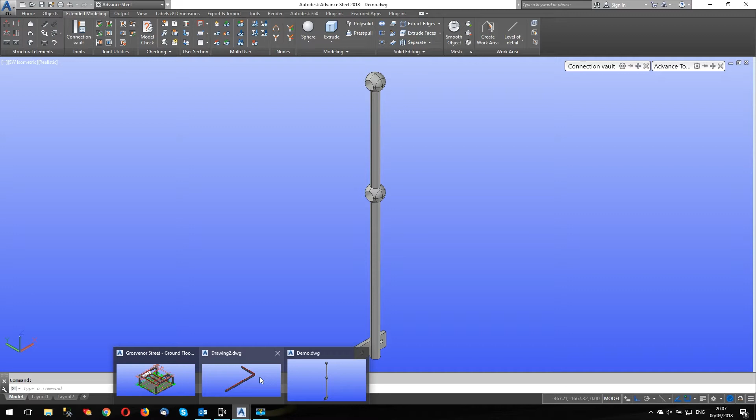Okay, so here we are, and the first thing I'm going to do is put a flat on the face of the flanges. So let's go to Objects, Flat, and I'm going to put it from this endpoint here to this endpoint here. You notice I'm using the shift and right click key to bring up the snaps. When I'm modeling in Advance Steel, I generally have node on as the only active snap. If I need anything else, shift and right click.

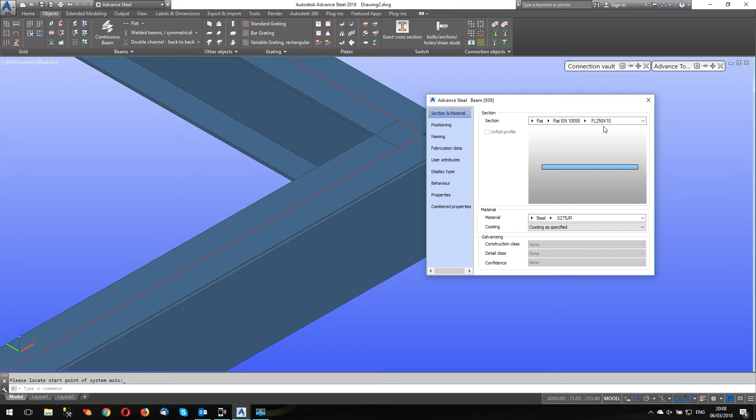I'm going to change the plate size. I know this is a 254 beam, so I'm going to change it to a 250 plate. You notice I haven't got much here in my short list - a lot of you will see this great big long list. There are settings in management tools called preferred sizes, where you can reduce the length of this list. I'm not going to go into too much detail about that now, but at some stage I'll do another video and we'll talk our way through that.

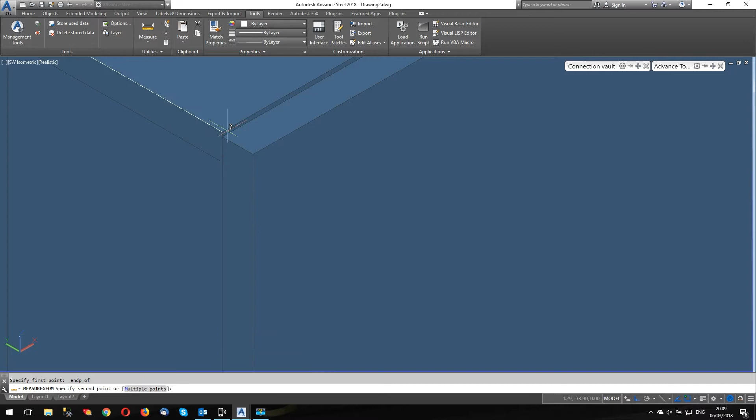Okay, so here's my plate. I've not welded it on, and you notice it's not aligned with the top - the plate's a bit smaller than the beam. For people who are a bit pedantic like me, what we can do is move that up to center it, of course there's no need to do this. So what have we got? We've got 1.4, so that is moving up 0.7. There you go, I'm a happy man now - centered plate. I think it must be a man thing, I don't know.

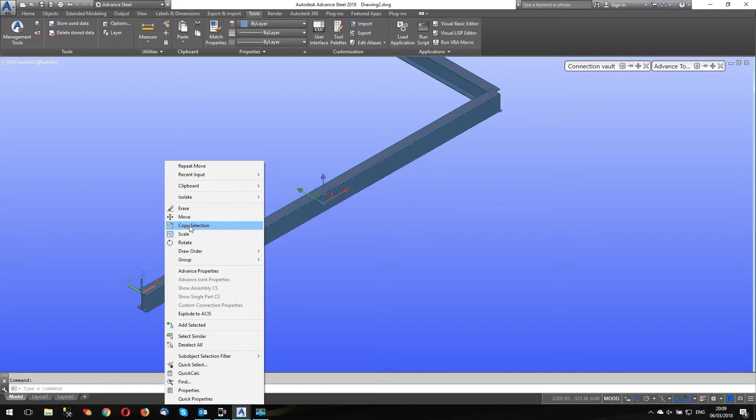Alright, I'm going to copy this - dumb beam, dumb copy, as I tell people that I train. Dumb beam, dumb copy. And I'm going to copy it to this endpoint here. Then I'm going to use a dumb rotate from the endpoint there, and rotate in this direction. And I'm going to split this beam.

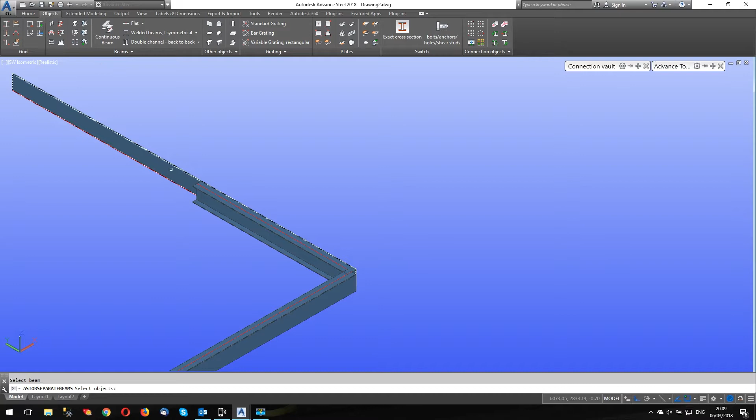So I'm going to split it there. I think I had a gap set earlier - yes, I did. And I'm going to split it at the node there, and get rid of this bit. So here we are, I've got a plate now on the front of the two beams.

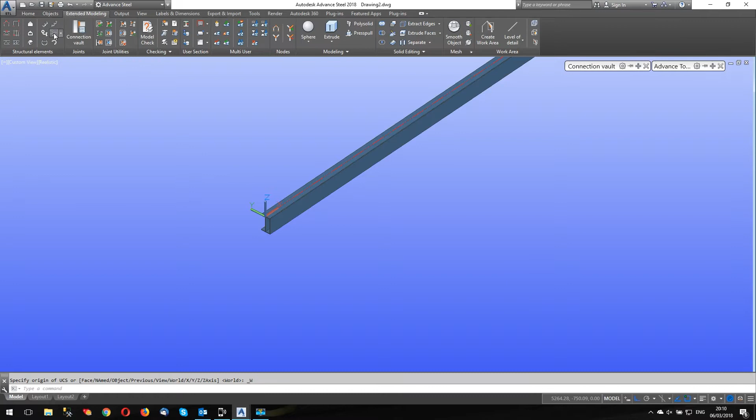Next, we're going to put some railings on. So we're going to make sure we're in World UCS, and we're going to go to the Extended Modeling Ribbon, and here are the railings. As you know, if I select both these parts, the railing will automatically go around the corner onto the two beams, or onto the two plates in this case, or two flats.

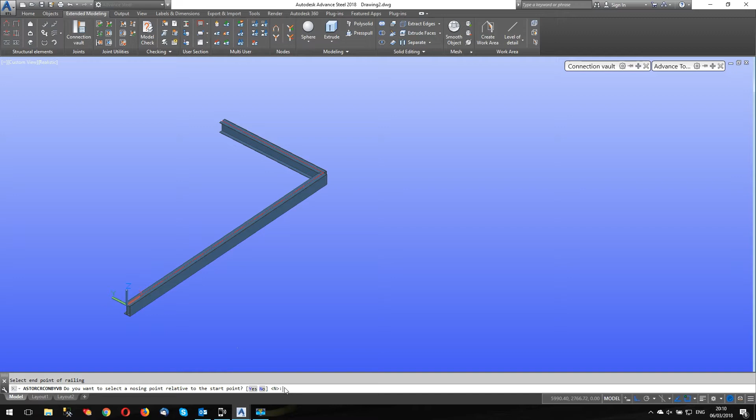So my start point for the railing will be here, and my end point will be here. And it says, do you want to select a nosing point relative to the start point? This refers to nosing points on staircases, so in this case the answer is no - the default is no, we can see that, so we just hit return. There's my railing, simple as that.

And we're going to edit it. So let's have a look, see what we're going to do. The first thing I do - kick plates. Bit of a non-starter, to be honest, in the railing macro.

If you wanted a continuous welded kick plate, then that's fine, you can do that. But normally we're going to put the kick plate on with things like U-bolts around the stanchions, or you might have tab plates welded to the posts. We can't do that in the macro, so I generally turn them off, and I would model those myself.

Okay, so let's have a look at the post first. Now I'm going to use a round post, and it's going to be 38 solid, and I'm going to replace this later on, but this is for placement. So I'm going to go for a 38 solid.

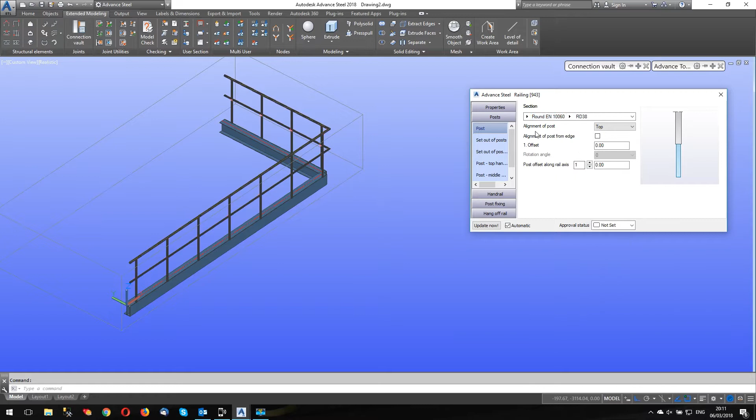Alignment of the post to the top. Well, I don't want it aligned to the top, I want it aligned to the face here, which happens to be right face. Two chances, left or right. I'm bound to get it wrong the first time, managed to do it every time.

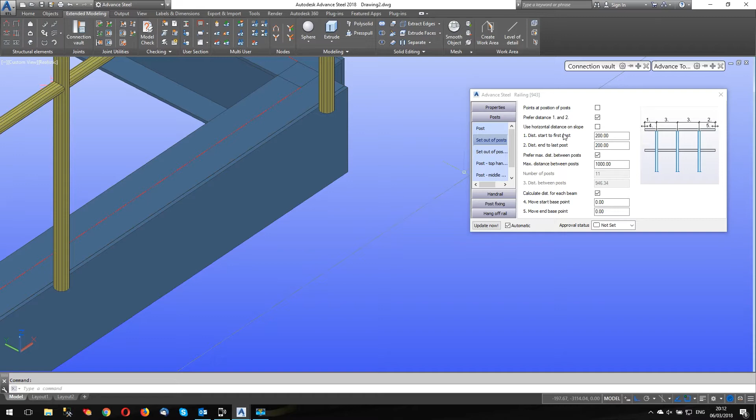Set out of posts. I've got a start and end point here, start to the first post and distance to the last post. That refers to this distance here to here, post to end. And I'm going to use a standard that I know, which is Wessex Water, and it's 300 start, 300 end.

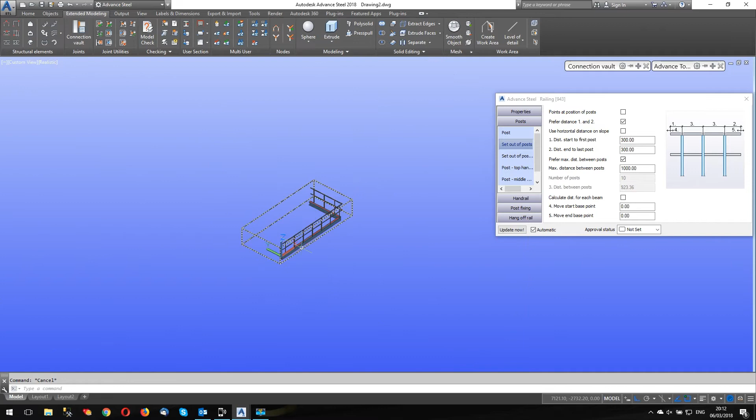And it says calculate distance for each beam. That means it's going to finish the calculation for the length on each of these beams. If I turn this off, what it'll do, it'll start at the 300 here, and whatever the centres of the posts are, I'm going to set this to 1500 centres. It'll do 1500, 1500, or close to it, allowing for equal distance.

So we'll just say 1500, 1500, 1500 around the corner, 1500, and then my 300 end. They're not actually 1500, you'll notice they're 1375. That's because it's equal distance, allowing for 300, 300, and equal distance between. If I make it calculate distance for each beam, it's now 300 and 300 and equal distance between. So you can see here, this is changed slightly.

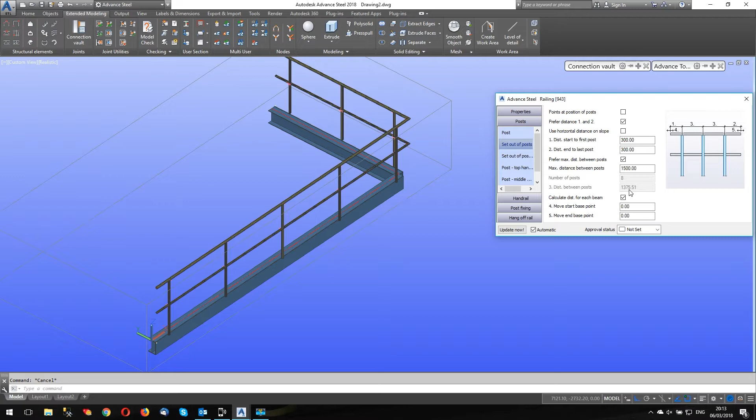So there's my basic layout. Let's have a look at the hand railings. I've got a tube hand railing here. I'm going to use a CHS. And you'll notice my short list, 42.4 at the top. I use it quite regularly.

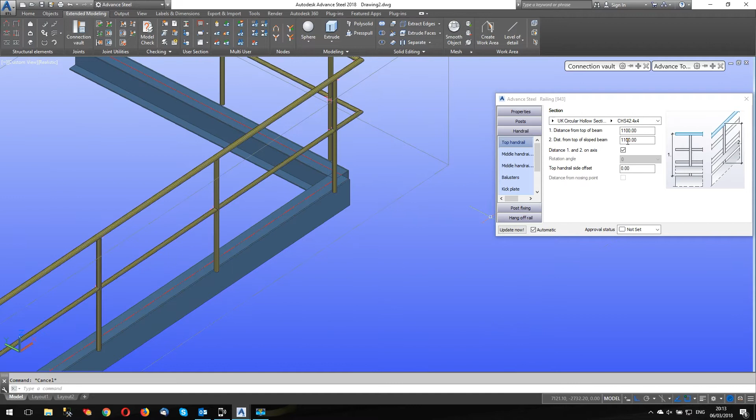Distance to the top, that's from the top of the beam, that's the top of the plate, so we have got that slight discrepancy, and I could add it on here. I'm not that pedantic. So the middle handrail, again CHS and 42.4 by 4, and you'll notice it's being measured from the bottom up 600. I'm going to say measure down from the top 500, and there it is.

And this is on slope, we haven't got slopes, so we don't need to set that. There's no balusters, this kick plate.

Handrail to handrail joint, I might change this to radius. And I know that those very nice people at Lionweld Kennedy can do a 90mm radius on 42.4, so I'm going to use that in this example. Of course, you would set this to your tooling radius, so it's worth having a check, see what you can do with that.

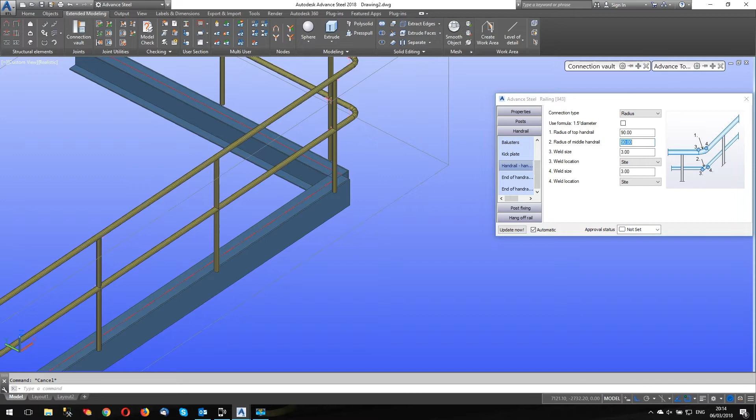Okay. End of handrail, I'm not going to bother with that, but we know we can put a loop on the end of this, either end or various methods of.

So let's have a look at the post top handrail. I don't need to worry about the fit on the top because I'm going to replace this post eventually, so I'm not too concerned about that.

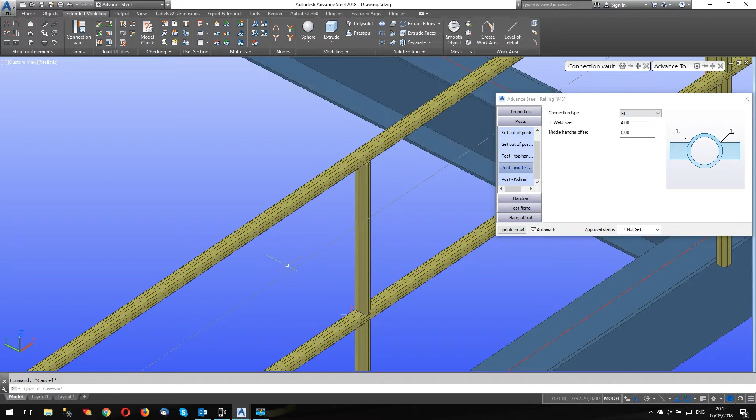The post middle rail, however, because I'm using solid stanchions, I want this middle rail to be continuous, so we're going to call that continuous there. Can't turn off the weld, but obviously I'm going to delete that later.

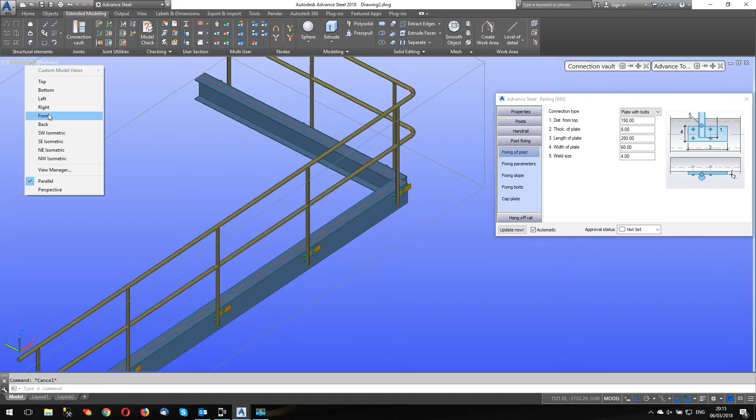Post fixing. In this case, I'm going to use plate with bolts. And that's a mess. The easiest thing to do with this is to go into a straight view, so a front view in this case, and I can see what's happening with this plate.

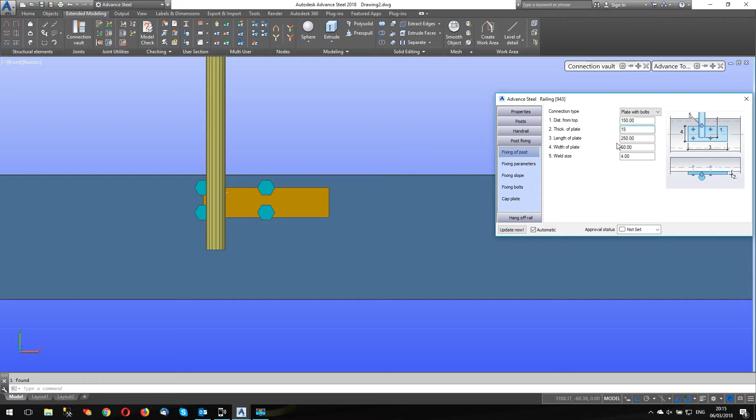So let's go to post fixing. So the first thing I'm going to do, distance from the top. This is from here to here. We'll leave it at 150 just for now. Thickness of plate I'm going to make 15, and length of plate I am going to make 150, and the width of the plate I'm going to make 65.

Again, that's a Lionweld parameters, just happen to know that.

I'm going to go to parameters, fixing parameters 2, and this involves placement of bolts, placement of plate, all this sort of stuff. So what I'm going to do, the edge distance number 1 is from the top of the beam, in this case the flat, to the top of the plate. I'm going to just make that 75, just a bit of a guess there.

And the offset here is the center of the post to the edge of the plate, and you can see it's 25 in this case. Well, we have a 150 plate, so to center it would be 75.

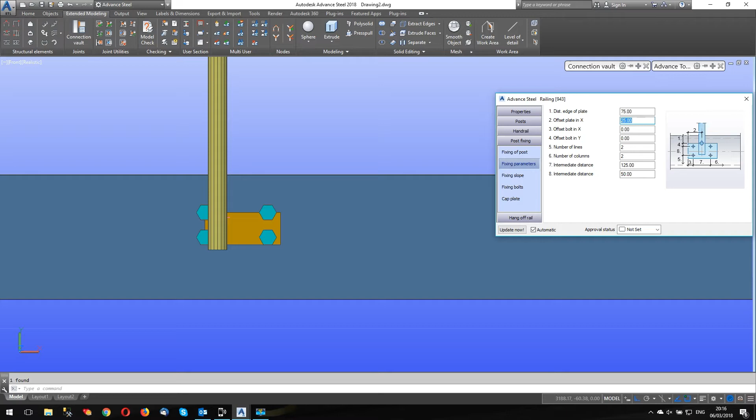I only want one line of bolts, and I'm going to center these bolts. So the intermediate distance is 100, Lionweld again. I'm not plugging Lionweld, I don't work for Lionweld, it's just that I know their standard. So the edge distance there is 150. 100 leaves 50, divided by 2 is 25, so we know that. And the distance here, so 65 plates, that'll be 32.5.

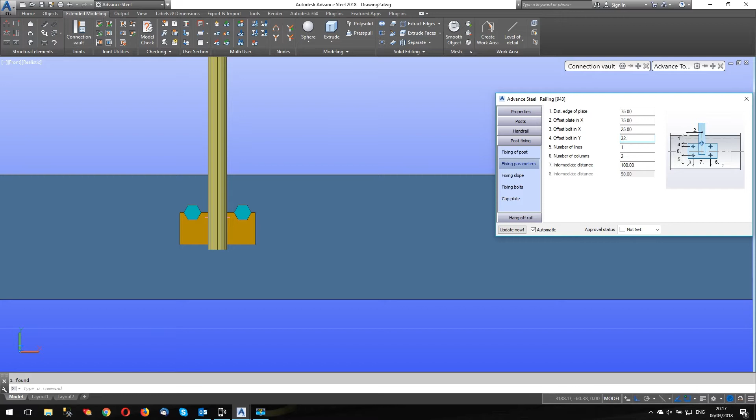There we go. And the last thing I'm going to do is the fixing bolts are going to be 16s, again specification, blah, blah, blah. And I'm going to change this distance from the top, and I'm going to guess this really. Well, it wasn't a bad guess. They are 140. Obviously, if I wanted to put an end cap on here, I would be 137, for instance, and the cap plate would be 3.

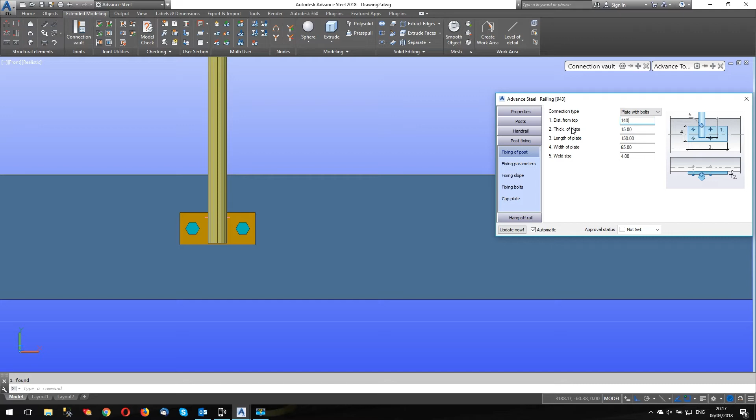But I don't need it in this case because I'm going to delete all this. So all I want this for is just position of posts. And there it is. That's it. If that's all I wanted to do, I just need to split this plate, this beam, this flat, beg your pardon, and delete the bits I don't want.

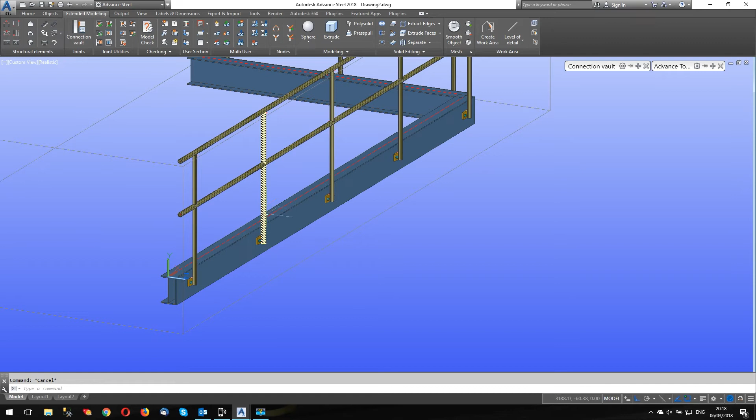However, because this flat forms part of the railings, if I were to split this and delete it, boof, off go the railings, and we're back to square one. So unfortunately, what we need to do now, we need to delete the joint box. And if I train you or anybody else trains you, they'll say, oh, you never delete the joint box. Well, unfortunately, in some instances, we have to delete the joint box. And this is one of them.

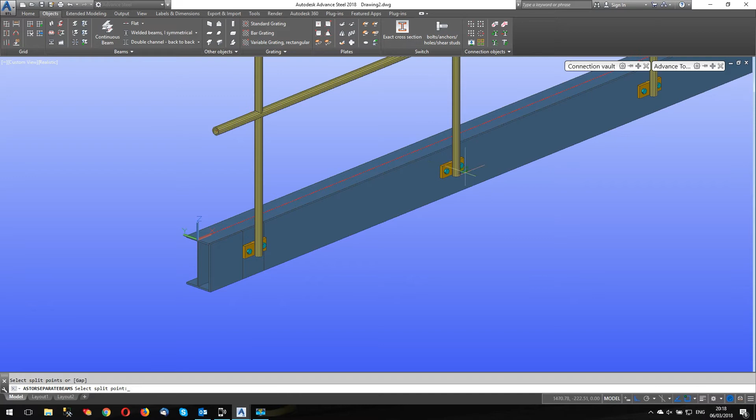What I'm going to do now, I'm going to split this beam using split beam. I'm going to split this, and I'm going to use the corners of the plate. So there you can see, look, I've split that. I'm going to split this one. Doesn't matter which corners we use. If I use that back corner there and the front one here, wouldn't make any difference. It's still going to split on those axes.

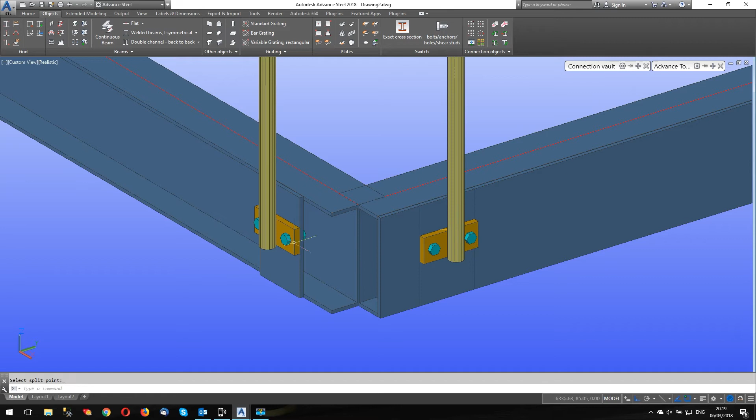Okay, so I'm going to split this again from there to there, and I'm going to delete the bits I don't want, which is those and those and those and those. Gone. Let's just rotate around here a bit. Let's do the same thing here. So I'm going to split this one there to there, there to there, and there to there. Delete, delete, delete.

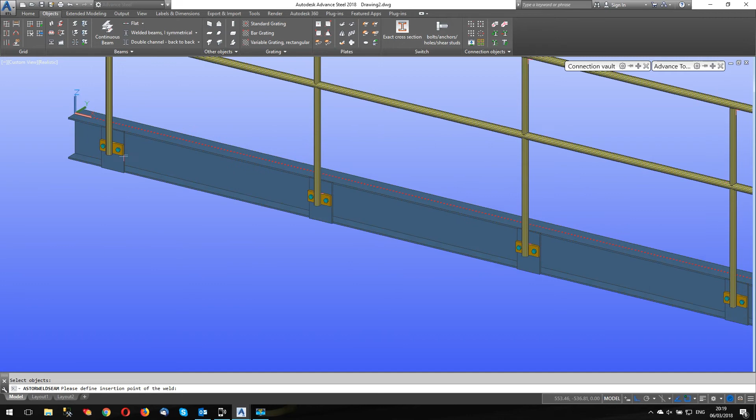Now I'm going to cheat here. This is a bad habit, but just for speed, what I'm going to do, I'm going to select all of those, and I'm going to put one weld, and again I'm going to select all of these, and I'm going to put one weld. There it is. Alright, simple enough.

I'm going to come back to these welds here in a minute because they're not desirable. We're going to do something with those.

What I'm going to do for now, these welds, I said we couldn't turn these off. So all I'm going to do, I'm just going to select all of these welds. And I'm going to delete those. I beg your pardon, delete the corner pieces as well. Didn't mean to do that. Just quickly do that again. I need those.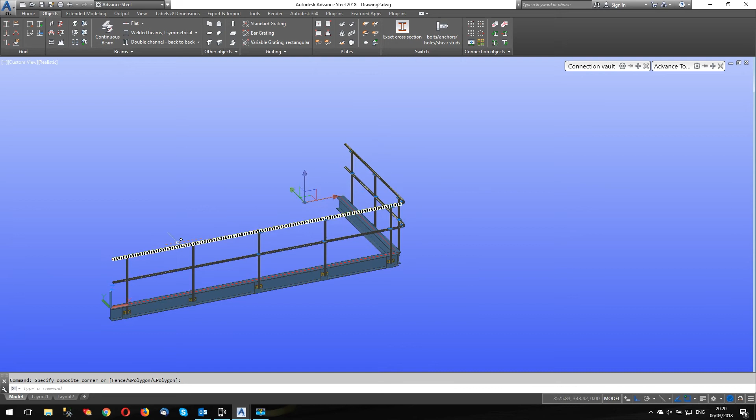So remember to deselect something. I hold the shift key down, I select it a second time, and that would deselect the selection, as it were. So there we go, I've just got rid of those welds. Save me a job in a minute, that's all.

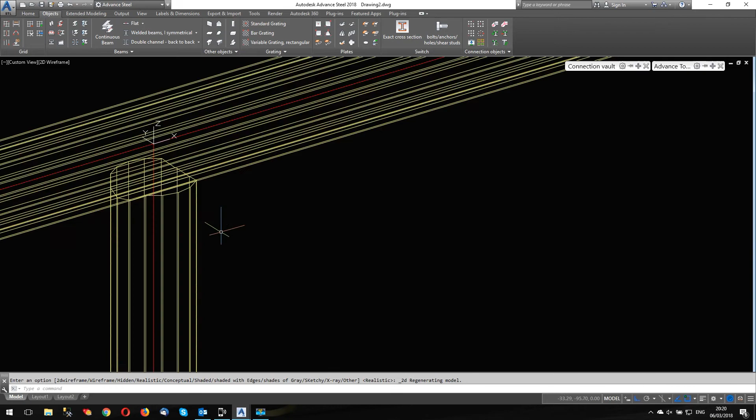And what I'm going to do, I don't need to do this, but I'm going to put the UCS at the top of this column. If I go into 2D wireframe, you can see where it is, look, center of the handrail, top of the column.

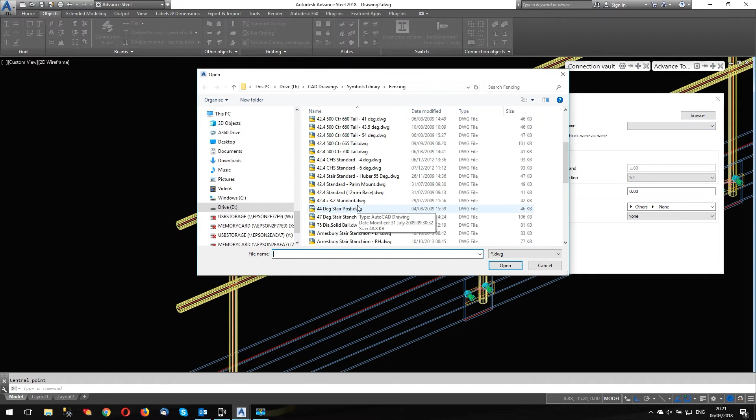And what I'm going to do, I'm going to use the good old Advance Steel special part. And the central point, of course, if I hadn't moved the UCS, I could have selected it. And then it asked me to choose the special part to insert, and I'm going to go here, and it's the one that I did, which is the demo. It says block already exists because I had a little play earlier on. Yours won't say block already exists, overwrite, because it was already in my system. So here it is, and it's inserted the block, and you can see where it's inserted it, and I'll tell you why it did that in a minute.

I can add some information to this. So if we knew the weight of it, I don't know what it is, let's say it's 20 kilos, probably a bit much, 15 kilos.

Coating, we're buying it in anyway, but we know it's going to be galvanized material. Other, I'm not interested in that, we're buying it in. Now when it comes to naming, I can call this railing post, because we know we've got one, so we can use that. The free remark isn't going to be used anywhere in the system, but the commodity number is, so we can call this a 38mm diameter solid stanchion. Let me turn off the caps lock this time and try that again - how many times do we all do that, it drives you mad.

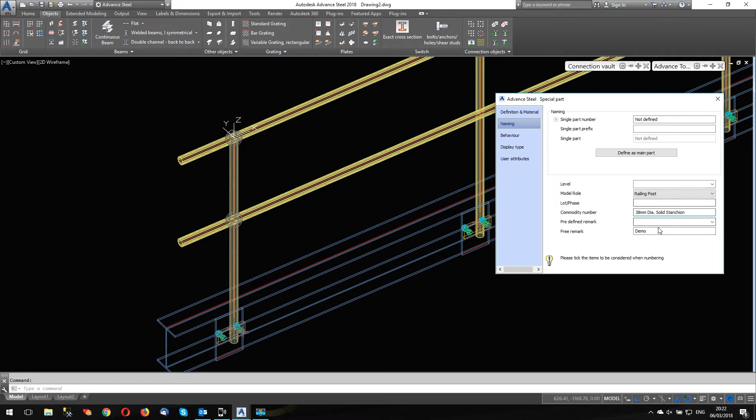38mm diameter solid stanchion. There you go. This is going to show on my material list. It's going to list these as special parts, using the commodity number to list it, so we know what we're ordering, how many we're ordering, etc. That is it.

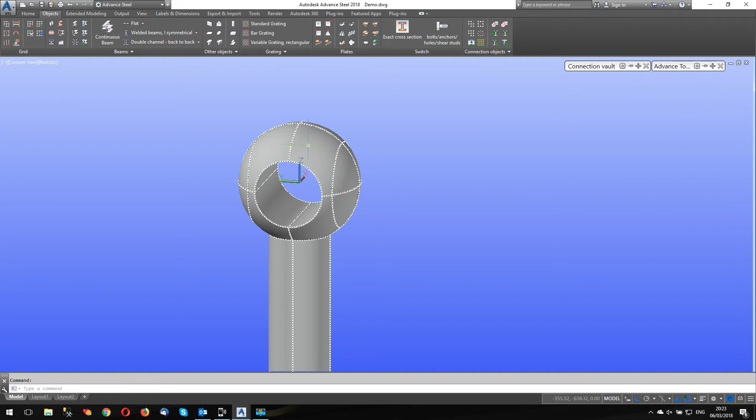Okay, when I inserted this, you'll notice it inserted where I put the UCS, at the top center of the railing, the intersection between that and the column. That's because when I created this part, I made sure that when I saved it, that insertion point was on the UCS. So I made sure I was in World UCS, and I moved the solid stanchion from the center of the ball to the UCS 000.

And the other thing I did, I put it on layer 0. The reason you do that is when I bring it into Advance Steel, I can then change the color. If I put it on any other layer, the layer would fix the color and I couldn't change it.

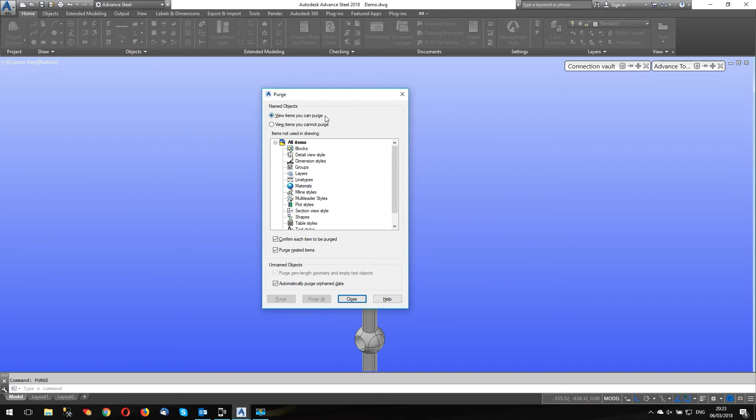And then the last thing I did, because I was in an Advance Steel template, is I used the purge command. I purged everything that I didn't need, so basically the layers have reduced to just the essential layers, and any blocks - there were none in any case - were deleted, and I just ended up with the part. All you do is save that, so save as, and I just saved it in my materials library, my symbols library.

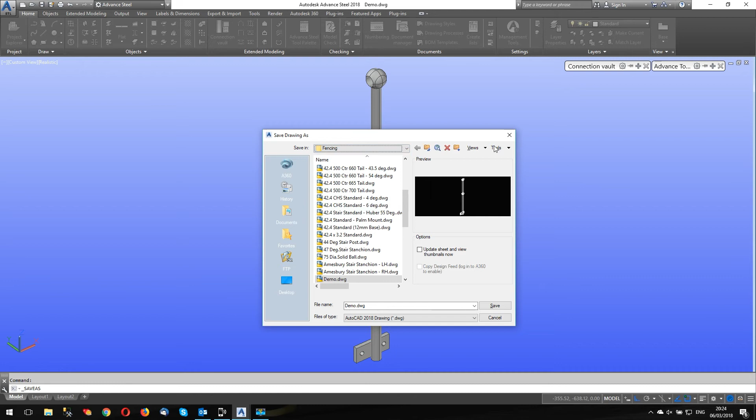I created one for myself, and that's it. I can just call on it from that location. So that's the important thing: UCS where you want the insertion point to be, and save it onto layer 0.

And here we are, this is what happens. So what I can do now, look, I can get rid of the old stanchion, and I don't need the welds here, and I don't need the plate. So let me get rid of those.

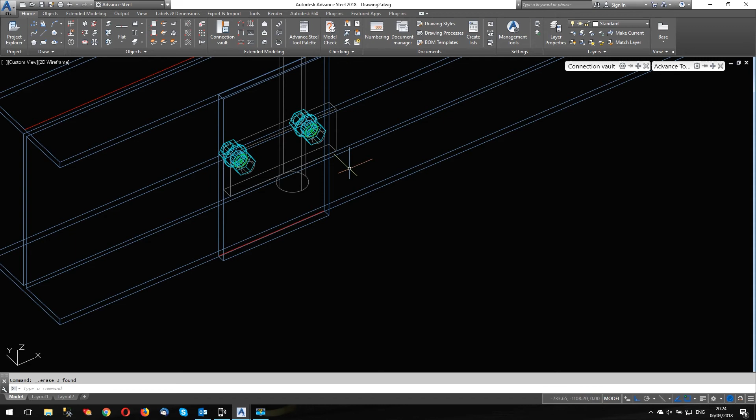I do need the bolts though, because the bolts are correctly positioned for the stanchion, since I made sure of that when I drew the solid. And Advance Steel, although this is a special part, recognizes the thickness of the plate - it won't put holes in for you. You'll notice the holes were already in the solid.

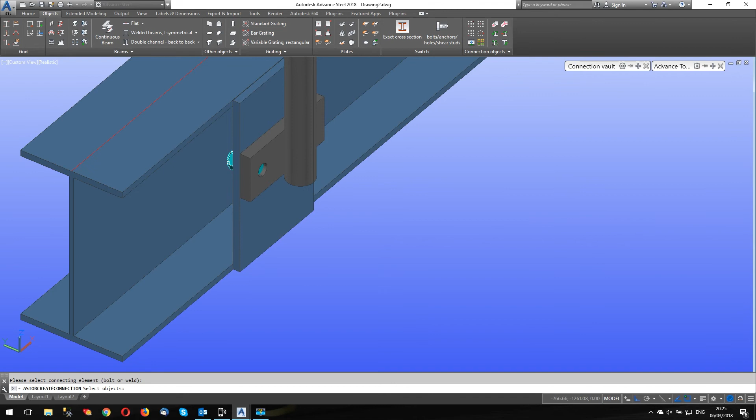Okay, so what I'm going to do now to make sure that the bolts go through all parts is use this tool, add objects to connection - you know this works for bolts and welded connections. I'm going to select this and these two parts, and there it is. All right, so that's it.

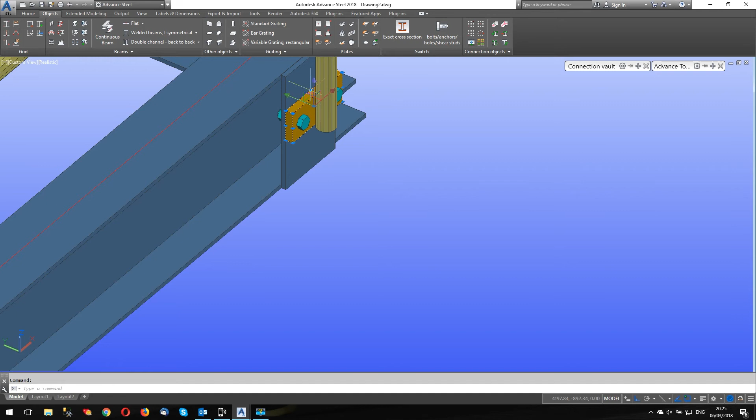So these parts I don't need, these parts I don't need, so let me just dump these a minute. All I'm keeping the posts for is simply to hold the place at the top of the stanchion. Okay, let's get rid of these a sec, just quickly - need that weld of course there, need that weld, don't need that. Okay, right, so there it is.

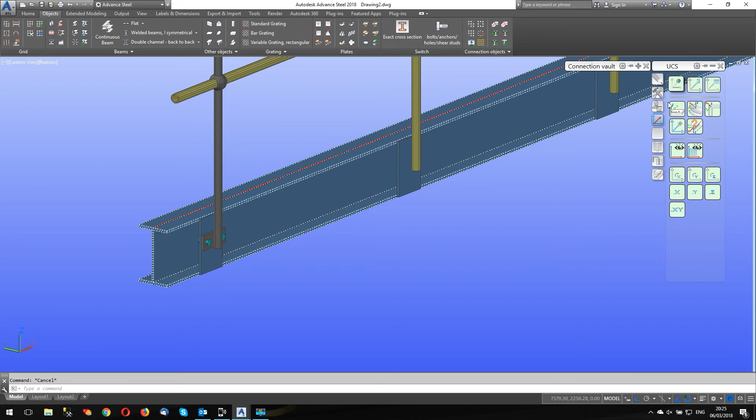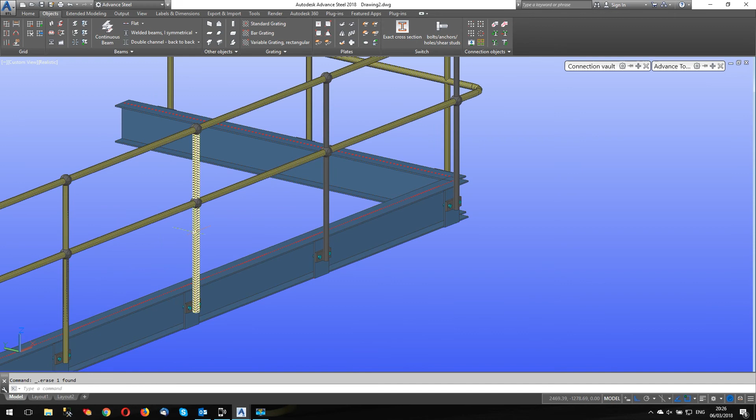And all I'm going to do now is use copy. I could use the dumb copy, but I'm going to use the advanced copy, and I'm going to copy it from center there to node, to node, to node, to node. Alright, I can delete the old advanced posts. There it is.

Okay, and of course I need to copy this again. I'm going to copy this one from the center point there to node. Now this one, orientation - look, wrong. Oh sorry, I didn't copy the bolts, just copy that again quickly. So I want to copy this and the bolts, and I'm going to copy from center to node.

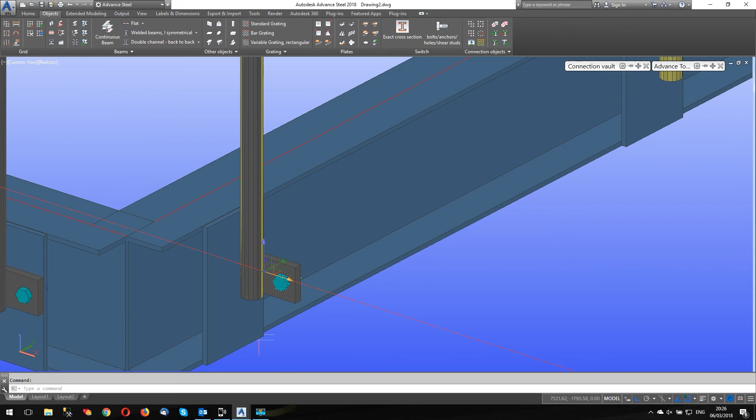There it is. What I need to do, I need to rotate this. So I'm going to use the standard rotate, and I'm going to rotate it from this node. And look, if I have a look at it, you can see as I rotate it - let's get it going the right way. There we go.

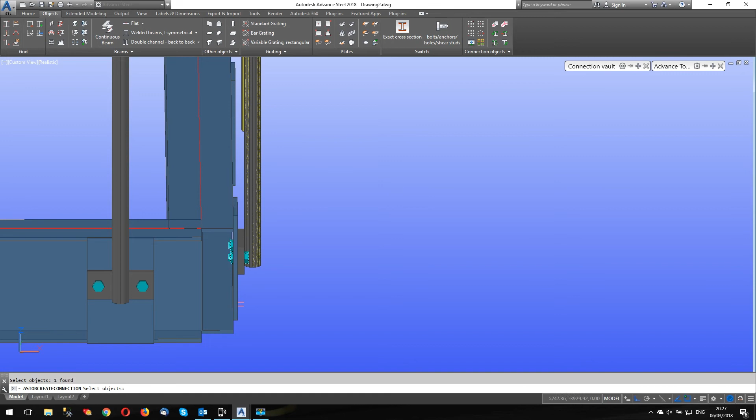The bolt's not going through here, so what I need to do again is use the tool to do that. Get rid of the posts, copy, boom, center to there, done. Get rid of that, get rid of that. Oh, didn't take the bolts again.

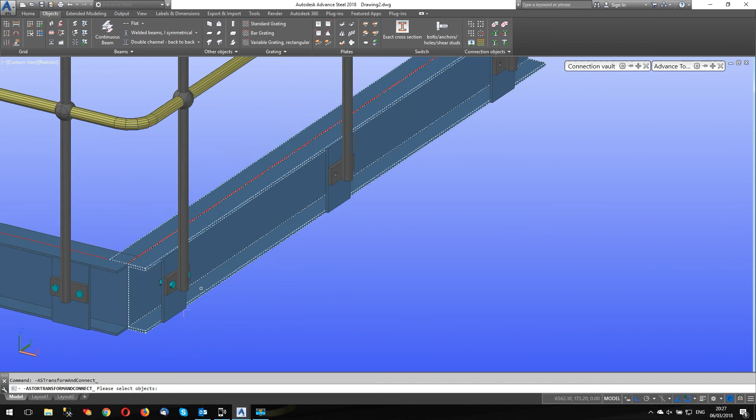I think I get the hang of this by now. Alright, so let's do that, and I'm just going to copy that from, doesn't matter really, endpoint there to endpoint.

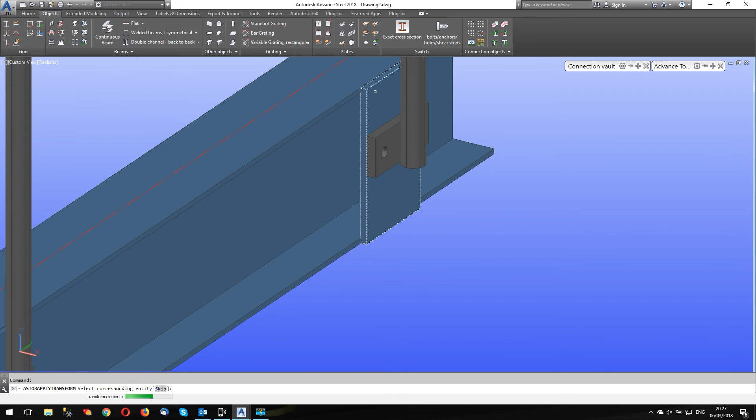Well, that was a nice and tidy thing. So let's copy that one. Endpoint, endpoint.

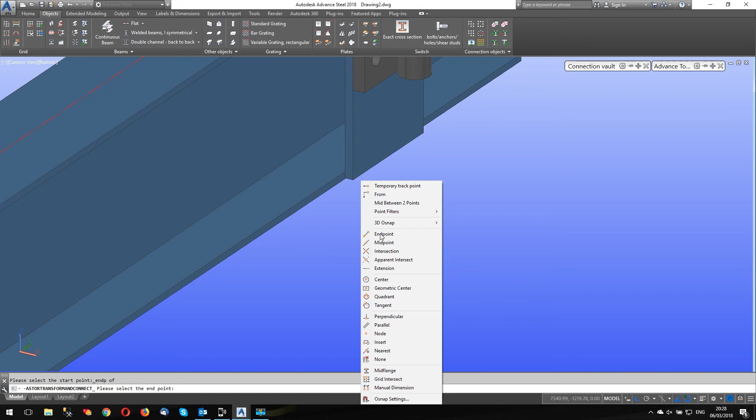Oh, sorry, I should have selected the solid when I inserted it. Alright, so there we are, nice and scrappy, but happens to all of us.

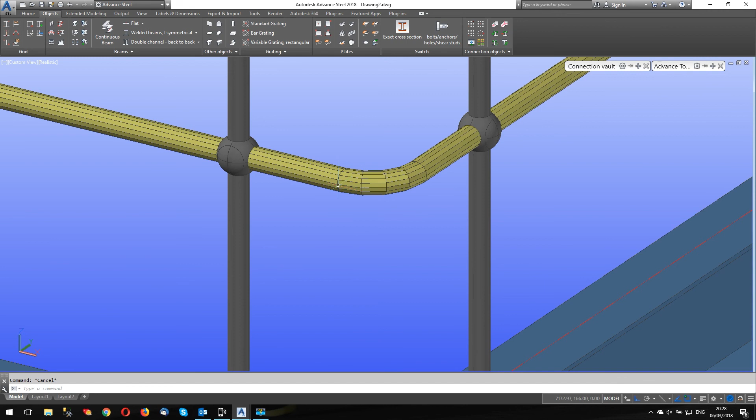Alright, so what have we got now? We've got these rails. This was a continuous rail, as you know, you can see it's going through. I've got this issue where these parts are separated. So all I'm going to do, now I've deleted all the welds, I'm going to use merge beams.

I'm going to merge this one and this one, and I'm going to merge this one and this one, this one and this one, and then that one and that one. So this is continuous now, continuous, continuous.

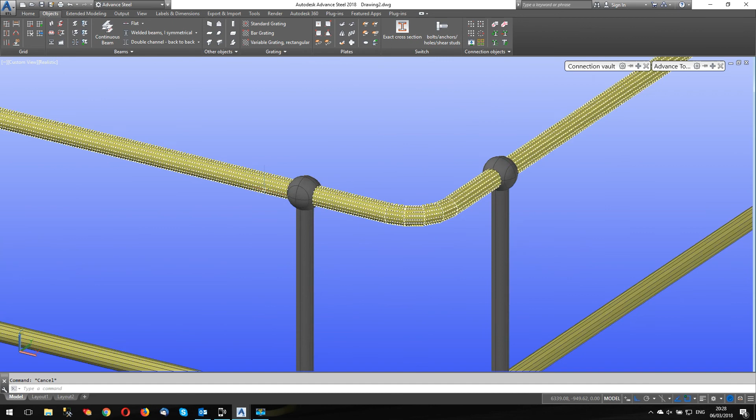But what we want to do is split this, because we're going to put a joiner in, and if we were to use a Kee Klamp joiner, there's a 20mm gap between the beams. So I'm going to go into 2D wireframe, and you can see this happening.

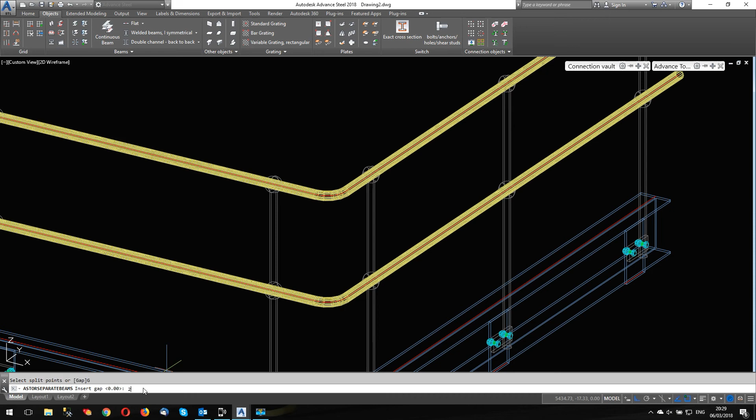I'm going to split beams again. So I'm going to split this one, and this time I'm going to set a gap of 20, hence the gap we had previously. So I'm going to split it at center there.

I'm going to split this one, and I'm going to go back to center there. And I'm going to split this one at center, wherever that is. Center.

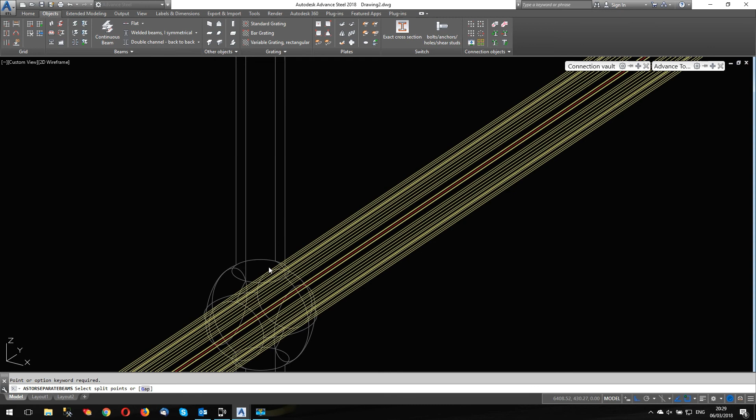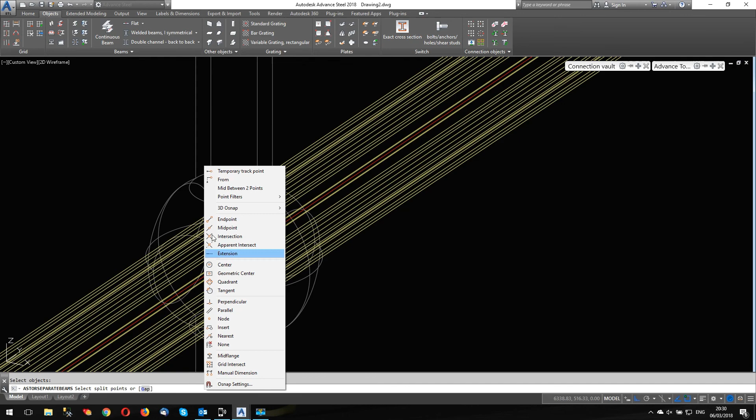Having a job finding my center. I'll go back to this one. Pretend that never happened. Here we go, center. There it is. And this one, center. There, look, there it is. Alright, better luck second time.

So what I've done now, these are individual parts. It's a good way of putting your bends in. If I even had a bend on the end of here, I would probably either draw a polyline using the end points, the standard polyline, straight line, radius, straight line, radius.

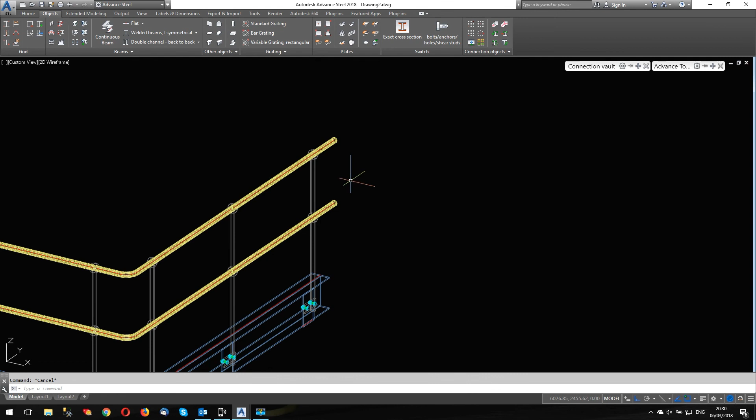And I would draw the end of this, and or the other way I could do it, of course, I could put a bit of tube between here, I could radius it and join it and split it and split it, so I could have the D ends on the railings.

If we leave it up to Advance Steel, we end up with a straight, a bend, a straight, a bend, a straight, a bend, and your material list shows all those components. All I want is a piece of tube, overall length with a bend in, and that's it.

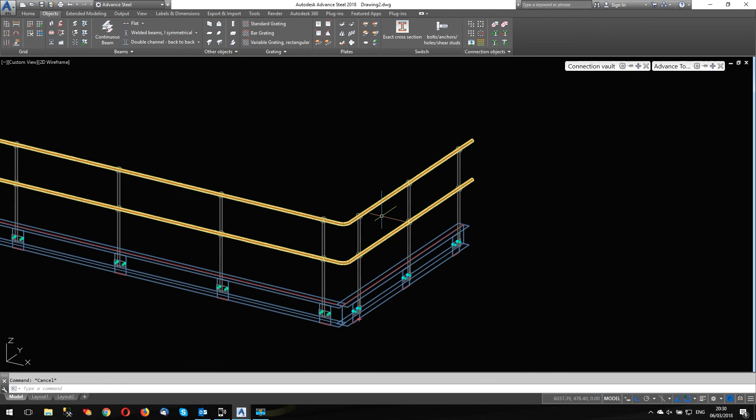Alright, so there we are. Works fine. Not too much work. Once you get into the swing of it, yeah, you can do miles of this in a day.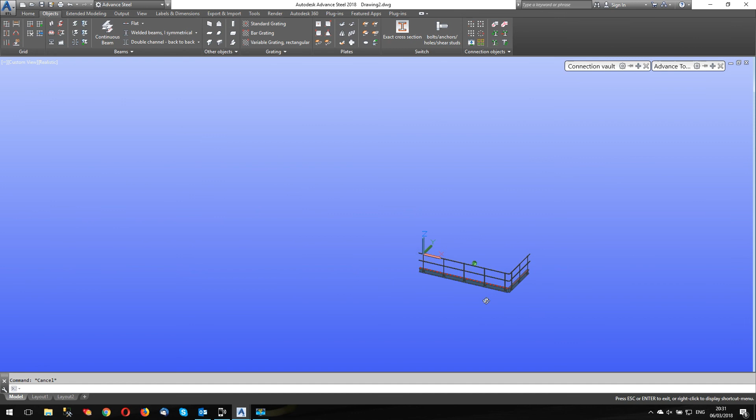It's not tricky. I try to use flat here. You can't put a railing on a plate, unfortunately, but you can put it on a flat. That's it. Nothing more to show you there.

So until next time, hope that's helped everybody. Hope you can see it's not the end of the world if you need to do this kind of railings. Takes a little bit of setting up, but I try and put the railings on using the advanced macro. The reason I do that is because it sets out the spacing for the rails. It does the mathematics for me, and all I need to do then is just delete the bits I don't want, put in the bits I do want, and hey presto, ball post railings.